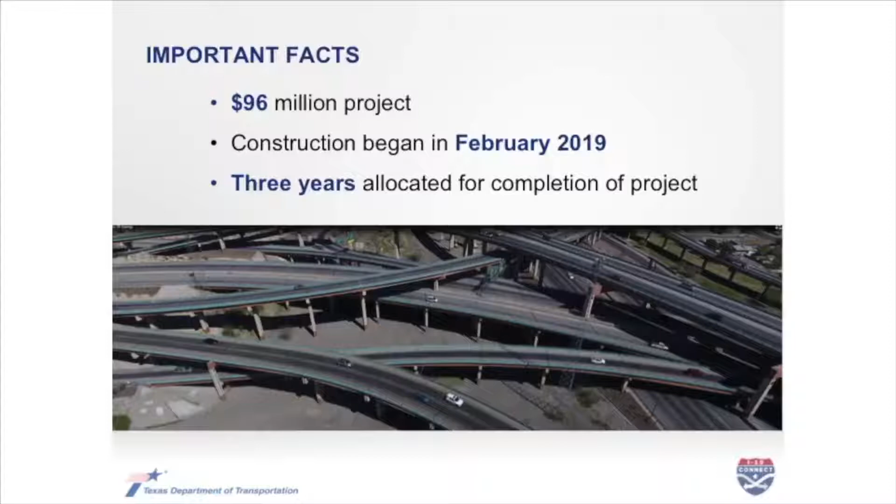A little bit of information that's not changed about this project, but still very important. A $96 million project. Construction began in February of 2019, and all told, there were approximately 3 years allocated for completion. So do a little bit of quick math, and you can tell we're getting close to halfway through this project. Now, why is this project necessary? Why is 3 years worth of, frankly, inconvenience worth it to the traveling public? It's all because of what you see here in this view.

Everything you see in this view, which is taken as if we're flying above the spaghetti bowl, everything you see in blue is a new ramp, either a completely new ramp or a replacement of an existing ramp. The Connect in I-10 Connect is making it easier to get from I-10 to Loop 375 in central El Paso. The project will achieve that by creating separate ramps for traffic going down to Border Highway, separate from traffic going directly to the Bridge of the Americas.

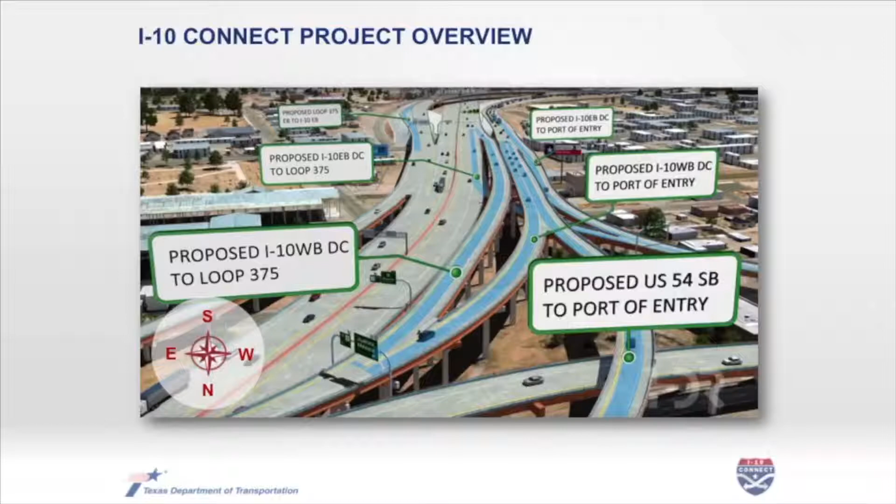So whether you're going eastbound on I-10, westbound on I-10, or southbound on US 54, if you want to get to Loop 375, you'll have your own ramp. If you want to go to the Bridge of the Americas and cross into Juarez, you'll have your own ramp. Another important function is about changes in the Paisano I-110 area immediately north of the Bridge of the Americas. We'll get into more detail on those functions in just a little bit, but we have a video presentation that includes some driver's eye views of the project and what it will look like when all is said and done.

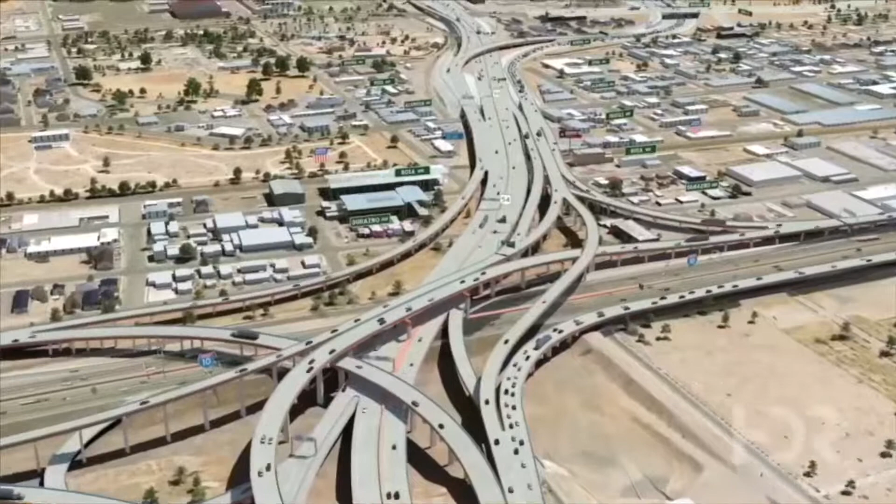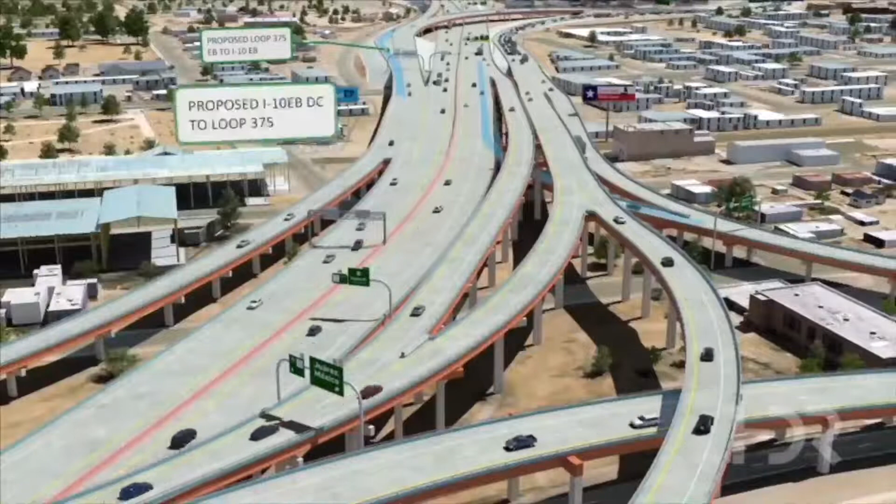So what you see in this video here is, again, very similar to that still image we saw a moment ago. We're flying high above the spaghetti bowl. Ciudad Juarez is off to the south, directly ahead of us. Downtown El Paso off to the right. The east side, Lower Valley, off to the left side of the screen. And here you're seeing, highlighting in blue, each of those new ramps, which will give you direct access directly from I-10 or US 54 to the Bridge of the Americas, or allow you to connect directly to Loop 375.

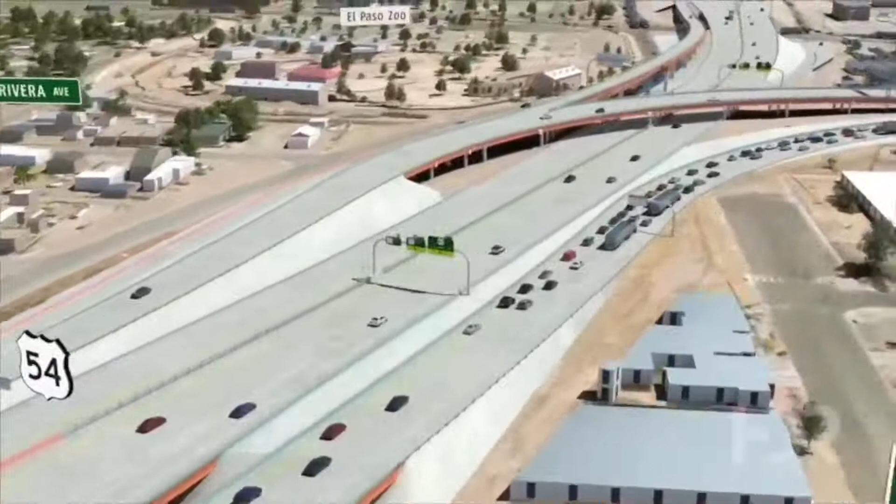We're going to continue flying south along US 54. You'll see the El Paso Zoo come into view at the very top of your screen. And as the camera turns, one thing I'll ask you to notice is those vehicles down there at the very bottom of your screen. Those are the vehicles which are heading south towards the Bridge of the Americas. When this project is complete, all traffic will access the Bridge of the Americas via Interstate 110. That's that short freeway spur that connects directly into the Bridge of the Americas.

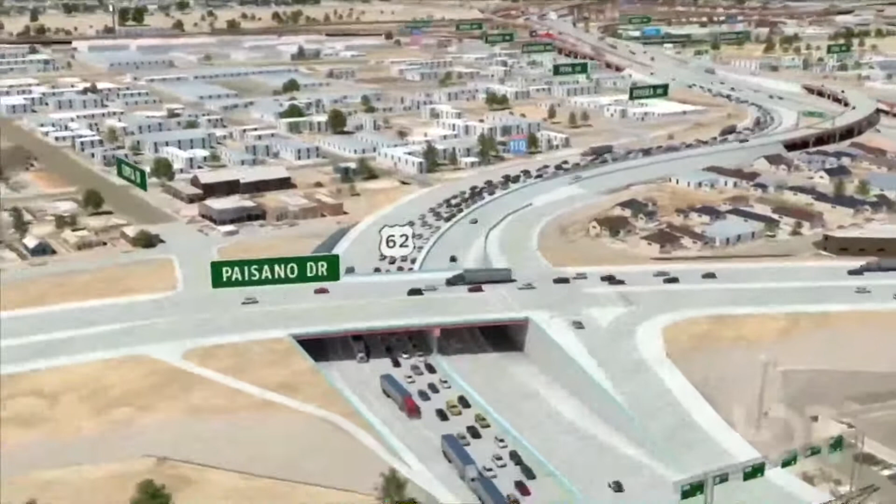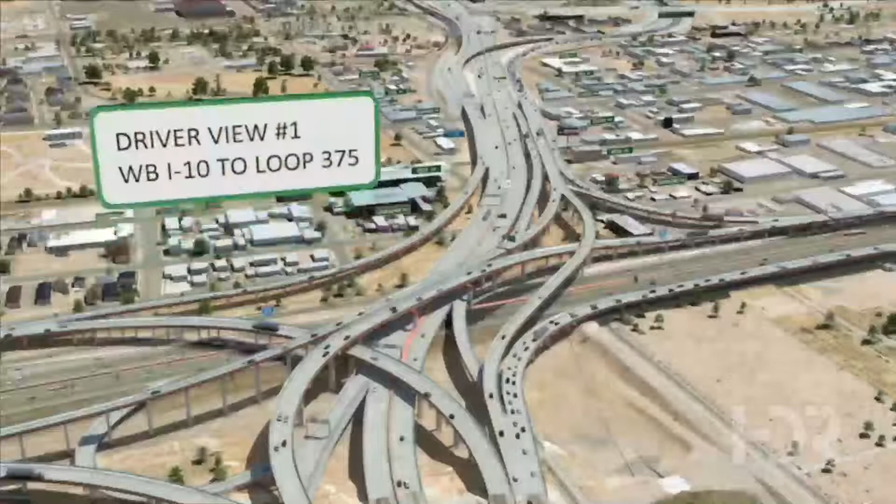So there you see something that may look rather familiar, but really dive into the details and notice there's a level of that interchange missing. We'll get into that in just a minute and explain how that impacts the project and how it'll impact your drive once all is said and done.

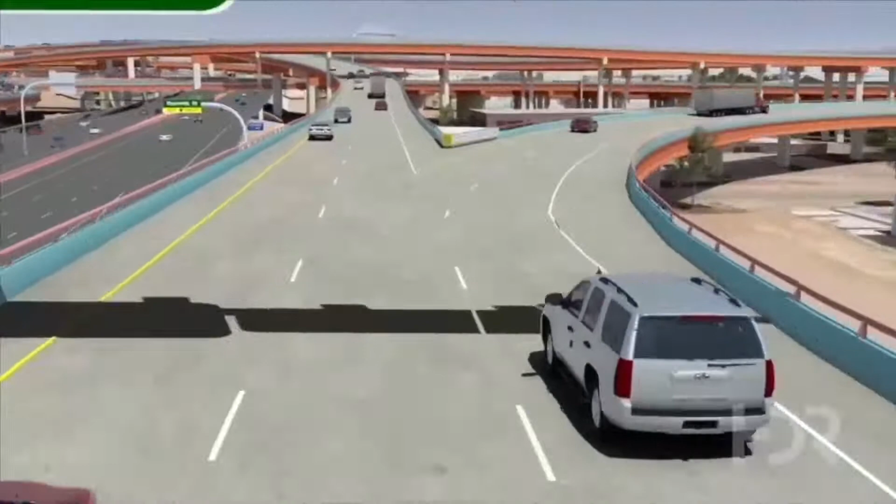All right, now we're taking a driver's eye view coming from downtown El Paso. This is a very similar view to what you've seen for many, many years. The ramps are a little bit wider, but the big impact we see is coming up. When the project is complete, if you would like to go directly from downtown to Juarez, you'll follow this silver SUV and go off to the right. But we're going to go off to the left and get on the main lanes of US 54, which will give us direct access to Loop 375 so we can continue on our way down to the lower valley.

One thing you'll notice as well, there is an exit off of US 54 to Paisano Drive, but as noted, no access from US 54 or Paisano Drive at this location to get you to the Bridge of the Americas. So all traffic heading to the bridge will have to make that decision at the Spaghetti Bowl coming from I-10 or coming from southbound US 54.

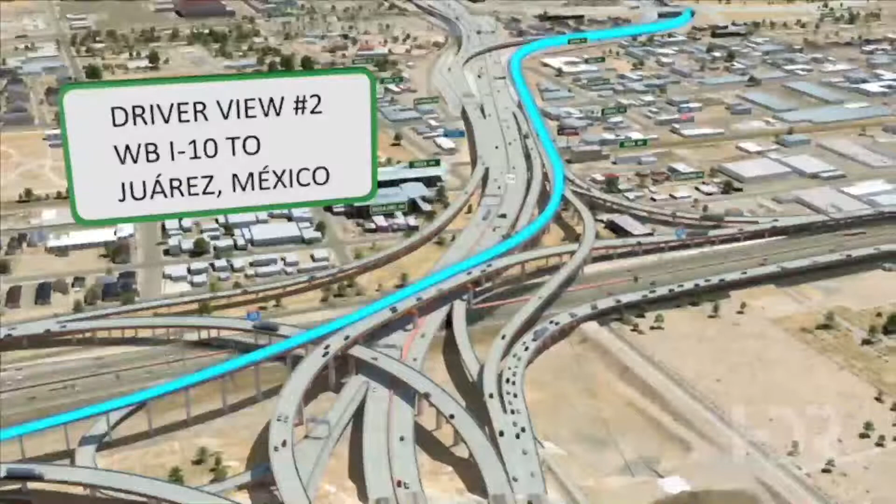Here's another driver's eye view for you coming from the east side heading to the Bridge of the Americas. Again, this is going to look very similar to what you've seen for years and years. Of course, this ramp we're driving on following this red SUV is closed right now, detoured up through the Pershing turnaround, and has been for some time. But you can probably go back in your memory bank and remember this view very distinctly.

Again, this is when we get to the big change, the decision point. Do I want to go off to the left side and go down to US 54 to get to Loop 375? Or do I want to go straight, follow this silver SUV, and head down to the Bridge of the Americas to have direct access to the Bridge of the Americas? That red car coming in from the right is coming in off of southbound US 54 with its direct access to the Bridge of the Americas.

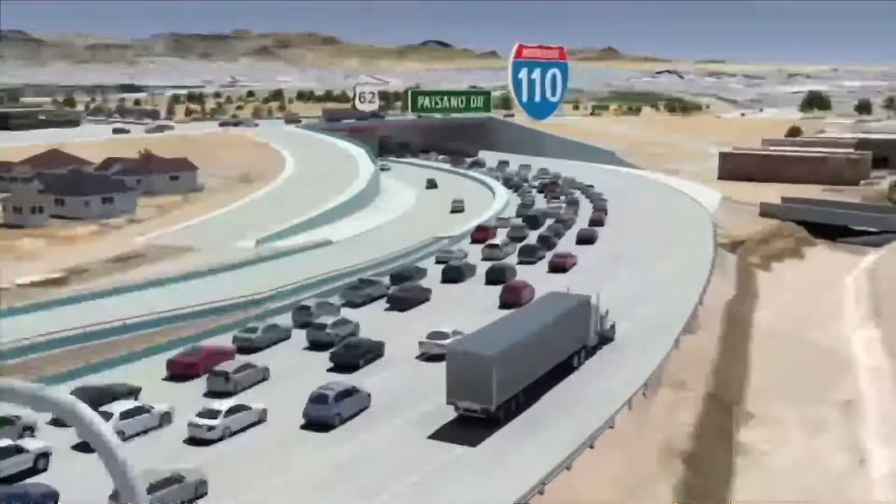As we continue traveling south towards the bridge, you'll notice there's a little more queuing space for vehicles that are waiting to cross into Ciudad Juarez. Another very important thing that you will notice is distinct lanes for trucks versus automobile traffic. Probably the biggest thing you'll notice at this location is that those truck lanes are no longer required to go up through traffic lights, which they have been required to do for many, many years now.

All right, so let's talk a little bit about some of the work that's been underway around the project site, or is underway right now. Again, we talked about that I-110, US 62, Paisano Drive interchange there north of the Bridge of the Americas. We were showing you in that illustration the way it's going to change, going from being a three-level interchange with 4 traffic lights right there on the middle level to just 2 levels where traffic goes east and west on Paisano and north and south onto I-110 in and out of the bridge. A lot of work in that area. Also work placing bridge girders for some of those new ramps from I-10 to Juarez.

This is something that may go unnoticed by many of us. Safety barriers line many areas of the I-10 Connect work zone to create an added layer of protection for motorists and those actually getting the work done. A lot of that safety barrier has been relocated onto the main lanes of I-10 near Piedras for some work on new dynamic message signs, which will be coming in as part of this project.

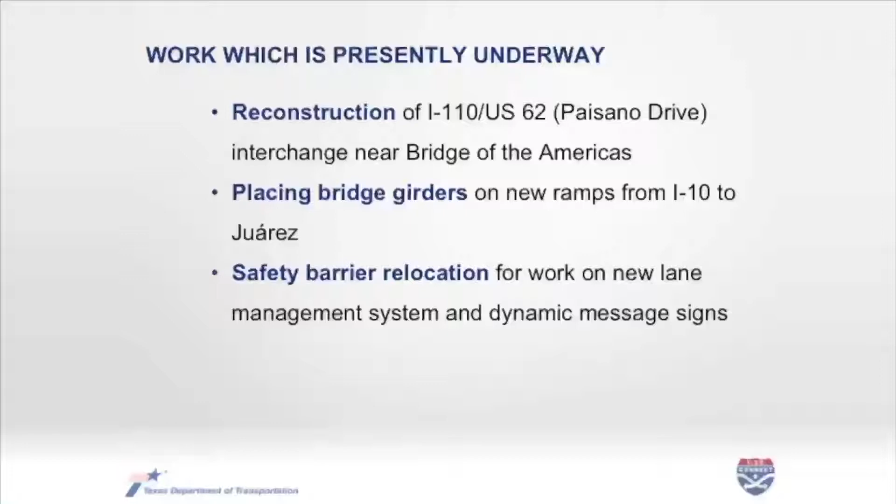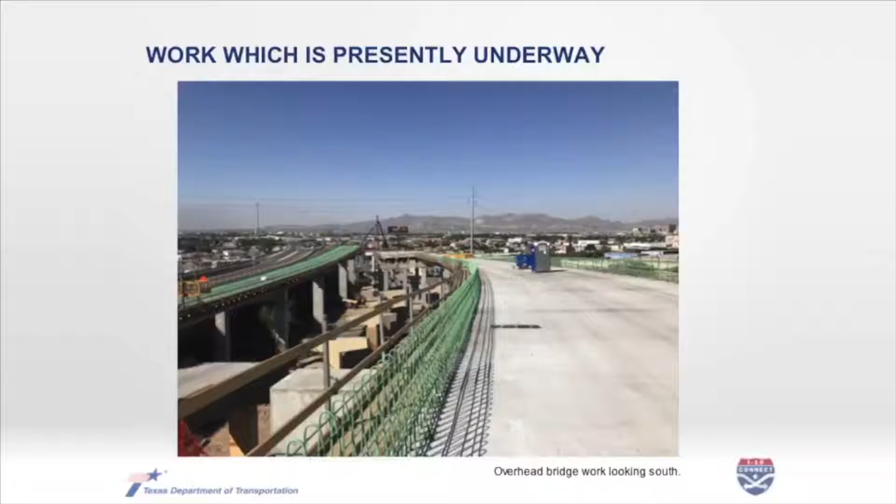Moving into the next slide, you can see we've gotten up on one of those bridges. This is an overhead bridge looking south, a little bit north of the last photo. We've moved closer to I-10 from Zavala, and this is one of those direct connector ramps that will connect directly from I-10 to the Bridge of the Americas.

In those past two photos, we talked about what was there. What I want you to notice about this photo is what isn't there. As in the past two photos, we're looking south, so the Bridge of the Americas and Ciudad Juarez are in the background, I-110 right there in the foreground on the El Paso side. A lot of asphalt is missing. You can see

a one-lane ramp allowing traffic to leave the Bridge of the Americas. All traffic coming out of the bridge is now required to go east on Paisano Drive, because work is underway right now on that interchange immediately north of the bridge.

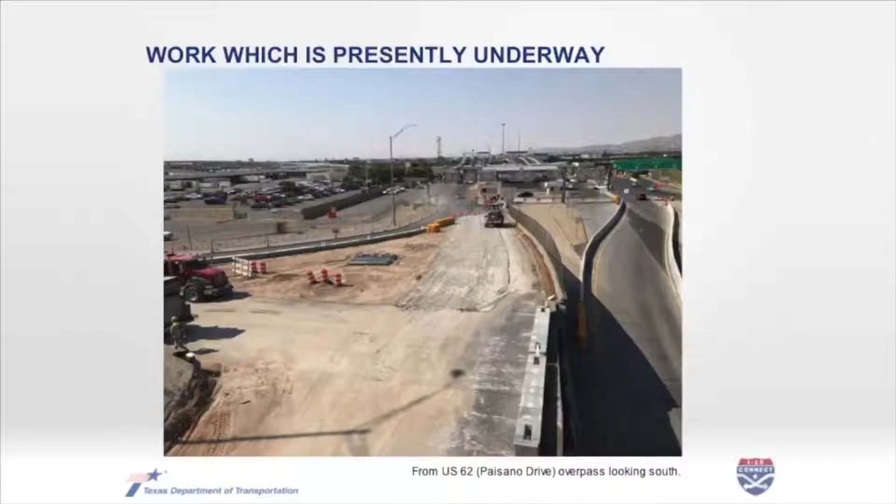A couple of weeks ago, on May 27th, we instituted some permanent changes as part of this project. Right there in purple, everything you see in purple, that's the area near the Bridge of the Americas interchange that was regulated by traffic lights. So all of those traffic lights are gone.

Several of the bridges that connected those roads are gone. So effectively what you're looking at now is a right turn coming off of Copia onto Paisano still allowed, a right turn from Paisano into the bridge allowed, and that right turn coming out of the bridge heading onto Paisano allowed. Very few other movements are allowed right now in that area. Traffic can still flow south on I-110, but all that northbound traffic has to turn onto Paisano when leaving the bridge.

A little bit north, I'll draw your attention to that exclamation point in that purple diamond. That's a permanent closure of a very small stretch of Stevens Street between the Franklin Canal and I-110, but one we recognize will have a big impact.

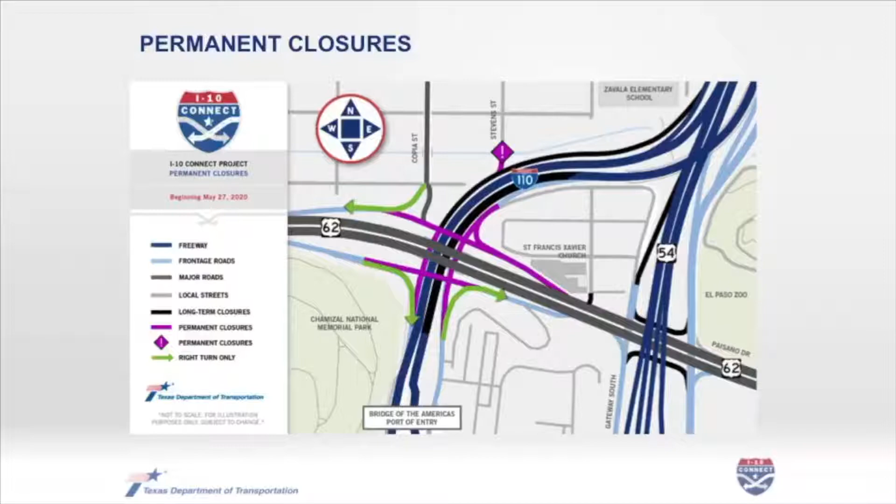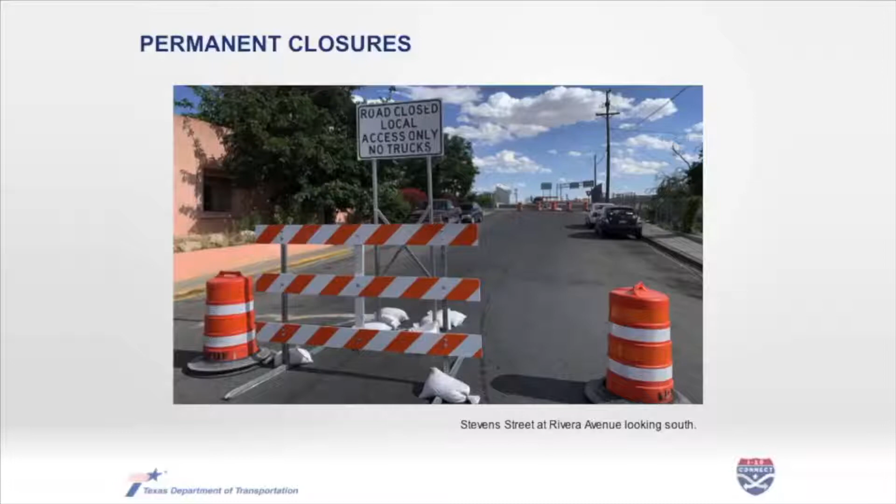So now is the time to begin building those habits. All traffic accessing Ciudad Juarez should plan to follow the marked detours and then access the bridge using southbound Interstate 110. We've talked a lot about vehicle detours.

Let's say you're coming from the zoo, making a left turn towards the bridge. You would go over to the International Bridge, making a small jaunt over a bridge above the freeway. That bridge is gone. Same thing for its companion on the south side.

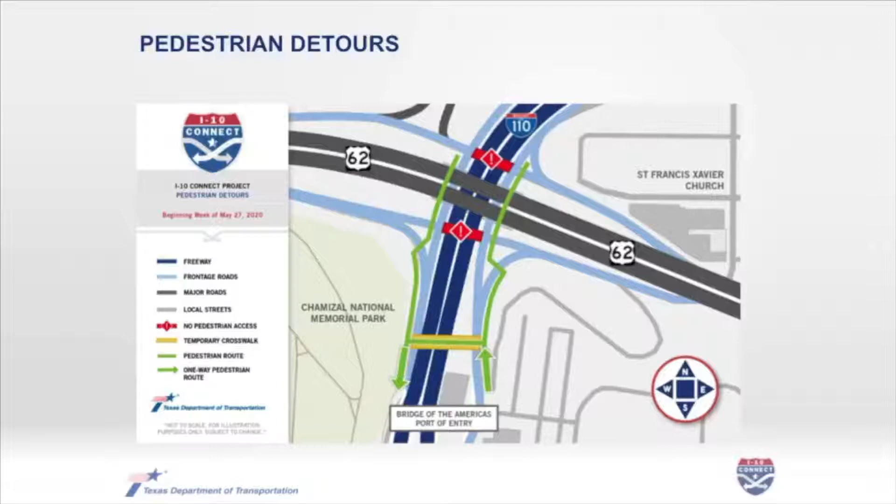It's really important to remember that a lot of us haven't been out and about as much as we have in months past, so things are changing out there, especially in the I-10 Connect work zone. Be especially mindful that some things you think may be there just aren't there in this work zone. One thing that is there is a very well-marked pedestrian detour showing pedestrians how to get in and out of the Bridge of the Americas.

We have a video presentation now explaining a little more information about the way to safely navigate around any pedestrian work zone, and specific information for how pedestrians can get around this work zone.

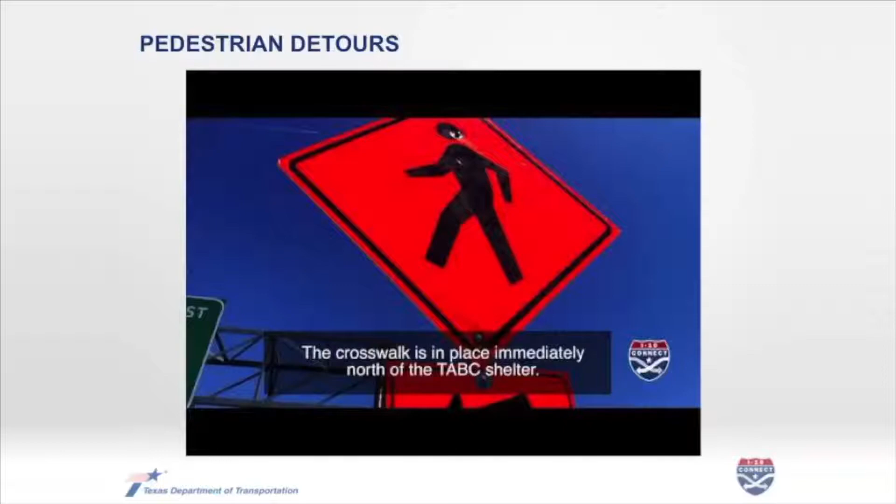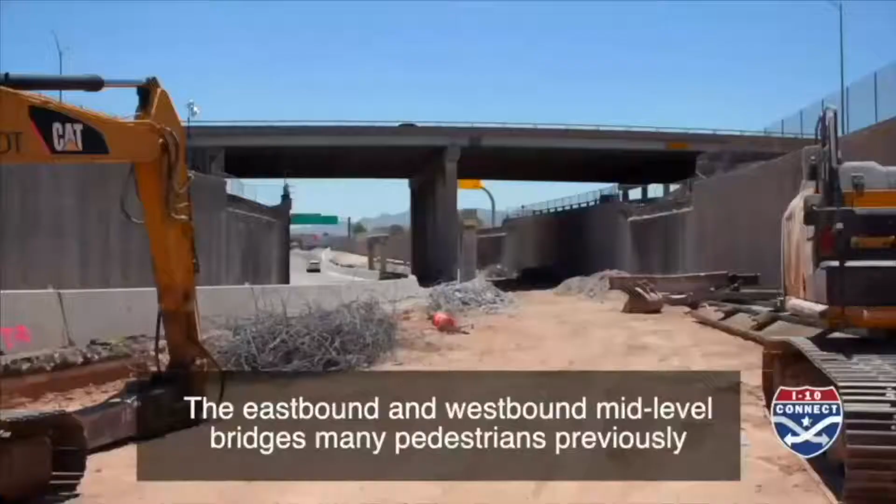Demolition of the middle level of the I-110 Paisano Drive interchange near the Bridge of the Americas is now underway. That means detours are now in place for motorists and pedestrians. The eastbound and westbound mid-level bridges many pedestrians previously used to cross I-110 have been removed.

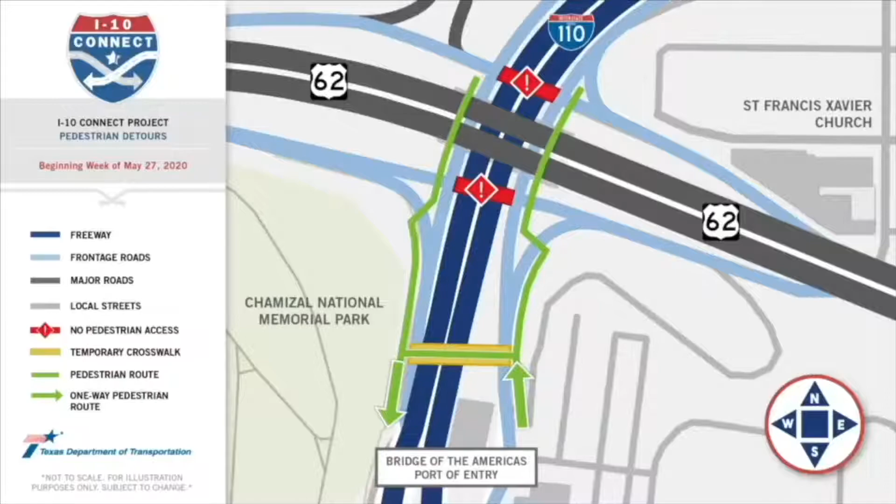This temporary crosswalk has been put in place immediately north of the Bridge of the Americas. Whether you're coming north into El Paso or going south into Juarez, this is the only place you're allowed to cross I-110. The crosswalk is in place immediately north of the TABC shelter.

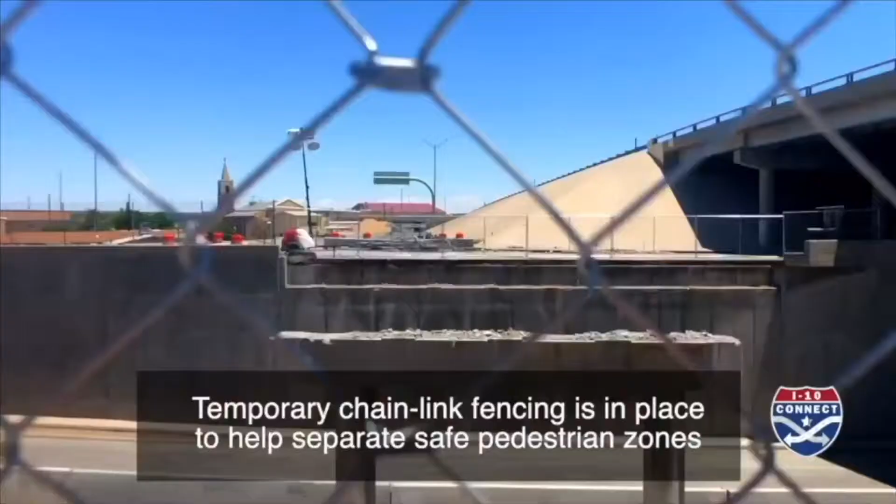New striping will help you navigate across traffic as a pedestrian. Enhanced signage will alert motorists of the temporary crossing. Temporary chain link fencing is in place to help separate safe pedestrian zones from work zones. Never go inside work zone fencing and never walk on the shoulder of the road.

TxDOT has these pedestrian safety tips no matter where you're walking. If a sidewalk is available, use it. Cross only at crosswalks, and make eye contact with a driver before you cross any roadway. For more information on the I-10 Connect project, visit i10connectelpaso.com.

So as we heard and as you saw, it's very important to make sure that whenever you're crossing the bridge, pedestrian traffic is significantly limited right now, but for folks who do have to cross, it's incredibly important to cross at those marked crosswalks. Also for motorists, it's incredibly important to be aware of that temporary crosswalk just north of the TABC shelter.

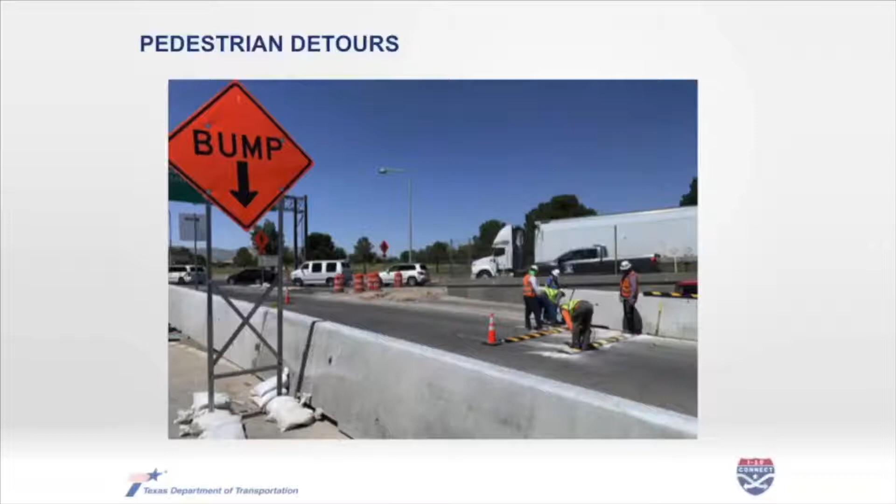Here you're seeing an image of speed bumps which were recently installed right before you get to that TABC shelter, right before you get to that temporary crosswalk. Again, just to remind motorists heading south, we know traffic is generally moving very slowly in that area, but it's especially important, even if you could go faster, don't, because that safe pedestrian route has been moved. That's related to traffic going south into Juarez.

I want to talk a little bit about a change which is likely coming in the next few weeks. We don't have a date certain, but just want to give everybody an update on some changes that may be coming soon for northbound traffic. As we mentioned, I-110 heading out of the bridge at the very bottom level of that interchange remains closed, so all traffic has to turn right onto Paisano. There may be some modifications coming to make it a little safer for automobile traffic. Right now, traffic enters Paisano by merging coming out of the bridge.

There is also a temporary access point for CBP. Because of the proximity of those two pieces to one another, it's been very tempting for many motorists to make an illegal U-turn from eastbound Paisano to westbound Paisano. So there may be some changes involving a slight relocation or modification of that northbound detour to make it a little more difficult, a little less incentivized to make that illegal U-turn.

We've heard from our friends down at the Bridge of the Americas about this, so we want to make sure everybody is being cognizant and follows those markings. When you see a sign that says no U-turn, or when you have any question about it, just don't make those illegal U-turns, because in a couple of weeks we will likely be changing some of the traffic control to make it more difficult to make that U-turn. Most locations along Paisano have prohibitions on U-turns, so keep your eyes open for some of that signage you may be ignoring.

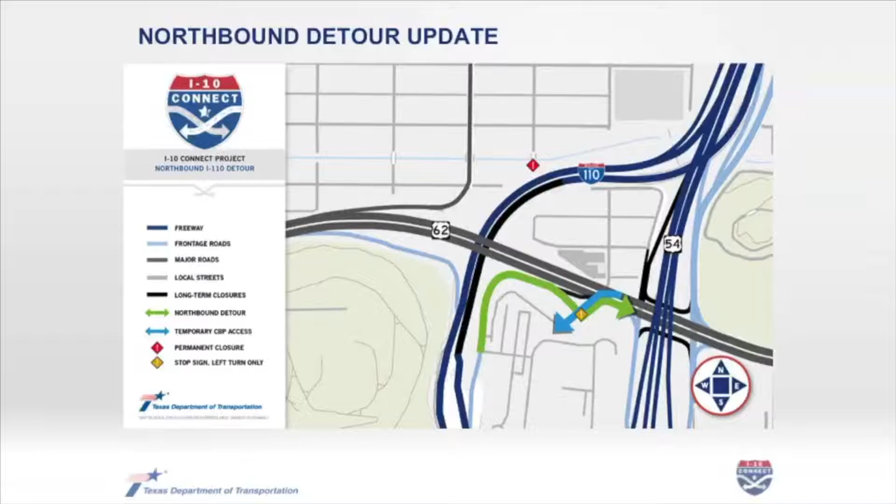We'll provide more details on those changes as they become available. This is a closure which is underway right now, last night, tonight, and tomorrow night, and will also be in place a couple of nights next week.

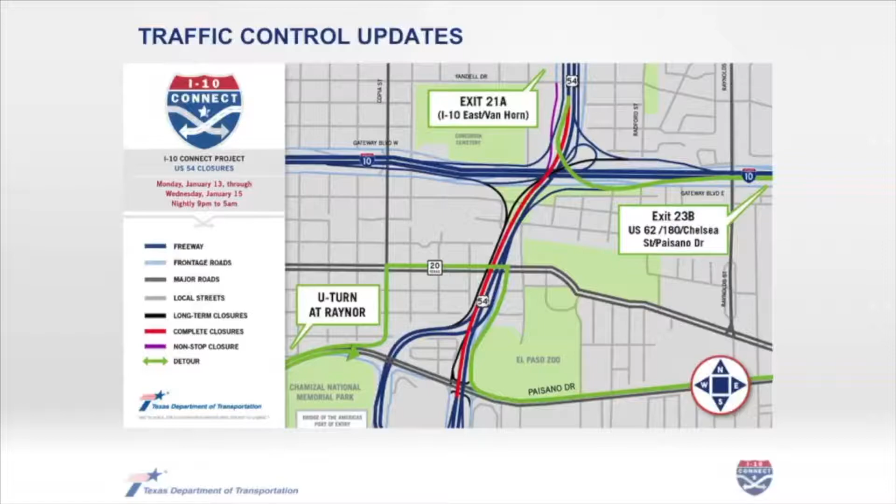I want to put this on your radar, not nearly as impactful as those changes near the Bridge of the Americas might be, but just want to make sure everyone is aware that in order to get those bridge girders in place, southbound US 54 is closed to all traffic from I-10 to Paisano last night, tonight, and tomorrow night, coming up again two nights next week. Also noted in purple near Concordia Cemetery, ramp E, which connects Gateway South to southbound US 54 at Yandell, has been closed since Monday and will be closed until Wednesday. We'll have a similar situation next week. This is all about making sure crews have room to maneuver those bridge girders into place for one of the bridges that will connect directly to Ciudad Juarez.